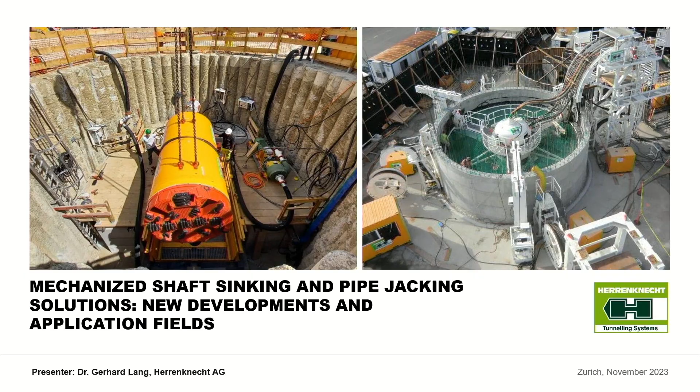For the ones of you who are not familiar with Herrenknecht, we are located in the southwestern part of Germany, the Upper Rhine Valley. It's only a 2-hour drive by car to Schwanau. By the way, in Germany you can drive with a Porsche as fast as you want, not like in Switzerland. So you can break it down to 1.5 hours if you like to, depending on the day.

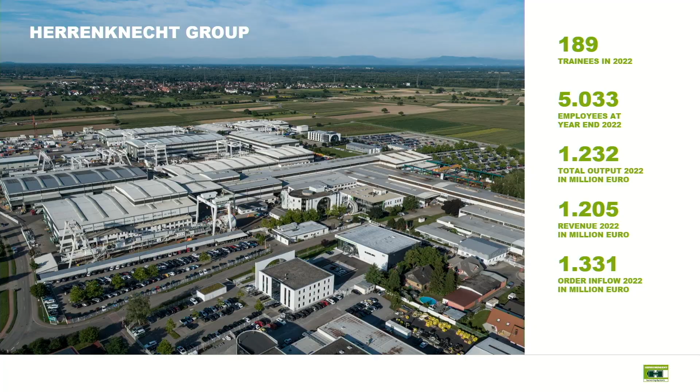Anyway, just joking. We were founded in 1977 by Martin Herrenknecht, who is still running the operation. 45 years later, we have 5,000 people worldwide. We have a turnover of 1.2 billion euro. We have manufacturing facilities in Germany, but also in China, Thailand, and India. At the moment, Asia is very dominant in infrastructure for subway and urban development.

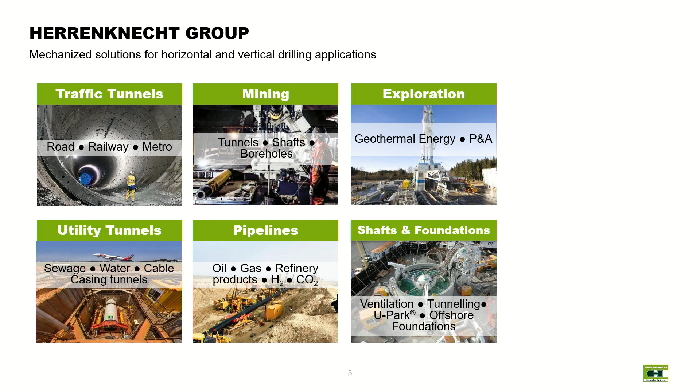We are currently divided into 6 major divisions. Traffic tunneling is the biggest one, of course the bigger the machines, the more turnover is involved. We have a mining division since 2000, exploration, going geothermal—that was our initiator in 2000. Unfortunately we had some failures with Staufen, some cracking, so the geothermal hype at the beginning went steeply down and diminished, but now it's regenerated with our energy crisis. So we need to tap into the soil as a geothermal energy source. We have the equipment and look forward to it, and believe in it.

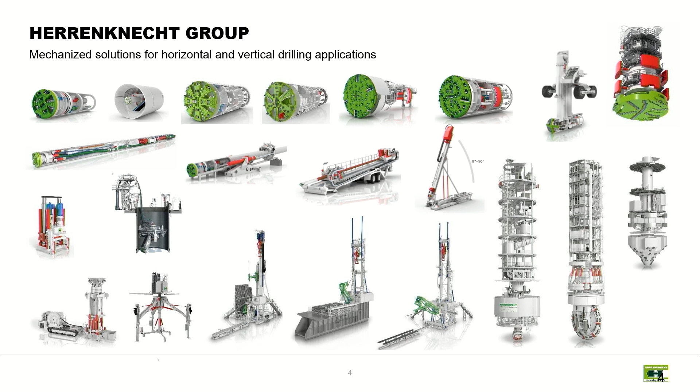That's a viable option. Then we have, on the bottom left side, the utility tunneling—I want to focus today a little bit. We also are in the pipeline business and shaft foundations, which I also have some slides about. That's just a little cross-section. So we are driven by the industry, by owners, engineers, contractors, who are asking for certain types of equipment and technologies to help them do installation in a very environmental and safe manner. And labor is also a big topic at the moment. Automation, digitalization is where we are, robotics—constantly working on it in order to make our technologies smarter, as it's called nowadays.

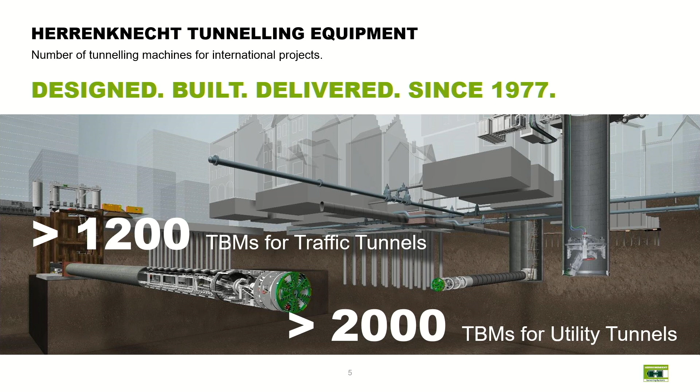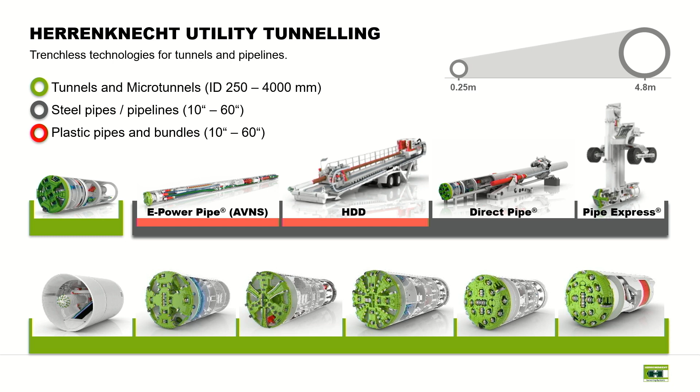As you probably know, Switzerland is a tunneling nation. You are fantastic tunnelers in perfect shape. You have done a world record with the Gotthard Base Tunnel, 57 kilometers, the world's longest railway tunnel. We were lucky enough to supply 4 machines to do the installations. It was really a challenge to go underneath the Gotthard Base Tunnel with 2,000 meters of overburden and really challenging ground conditions.

Let's go back to pipe jacking. I started 25 years ago on the big tunneling side, and the biggest tunnel boring machine at that time was 14.2 meters, for a tunnel in Hamburg. Now we are looking at 17 meter and bigger diameter tunnels. So the trend goes to larger diameters, longer distances, deeper alignments, more curves. So you have so much stuff in the ground, you have to go around, you have to steer around.

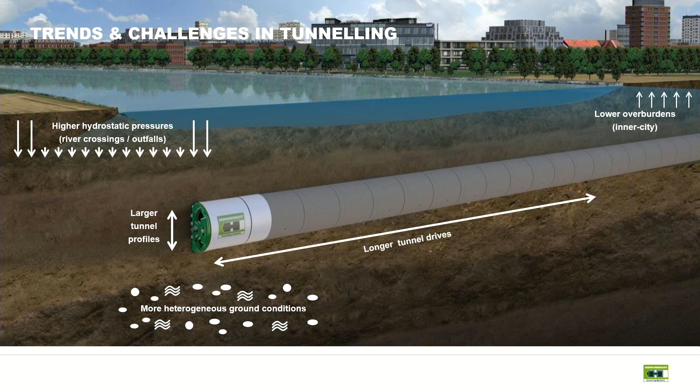But also some shallow applications in an urban environment, because the ground in a downtown area is already so congested with existing structures that it's getting tough to find space for your additional installations. And if you can imagine, as you go longer distances and larger diameters, the type of ground the machine needs to handle is much more complex. If we go deeper, we have hydrostatic water pressure. We heard in the morning about the Lake Mead project, 140 meters below the ground, or we are talking about 400 meters now, or 500 meters, which is 50 bar. Crazy—I don't know, are you scuba diving?

So if you try to go scuba diving, up to 20, 25 meters, it's okay. But below 25, 30 meters, you need a tri-mix. So your health is really at risk, and that's only done by professionals.

And when we talk about 500 meters, I'm not sure. We need robotics, I think it's not human anymore. But it can be done, definitely, don't get me wrong. And that's why we are relying on those projects to push the envelope. This gives us another vision to accomplish in the next whatever years.

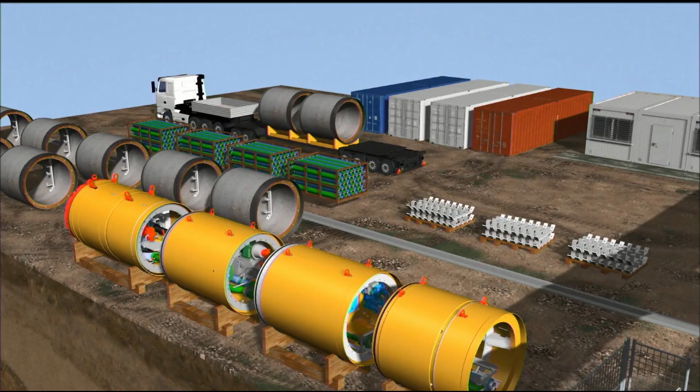So back to pipe jacking. Pipe jacking has been very popular for around 40 years. You have a launch shaft and a reception shaft, beneficial in urban environments, because it's minimum interruption on the surface. You have a jacking frame in the shaft, and you have a thrust block.

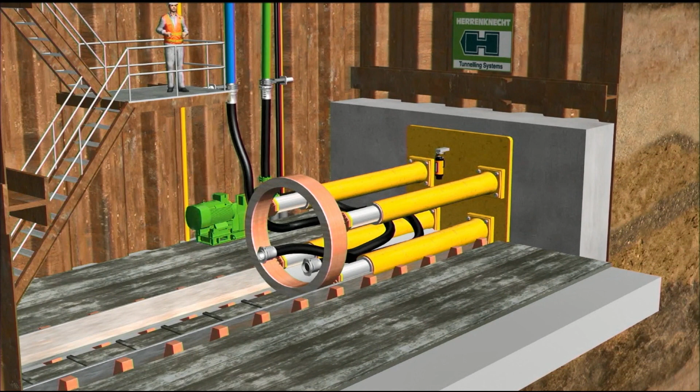The shaft needs to be embedded in the ground so that you don't get deformations. If you have deformations in your shaft, you cannot operate and steer the machine properly because your guidance systems get weird. Once you have installed everything and you launch the machine, you lower it and extend your thrust cylinders. Important also is a seal, everything needs to go through a seal here to avoid flooding the shaft.

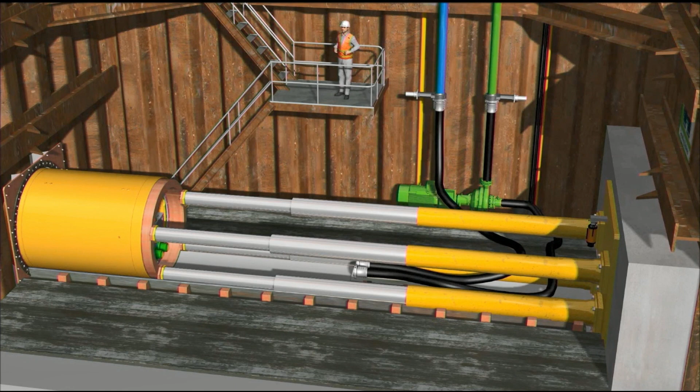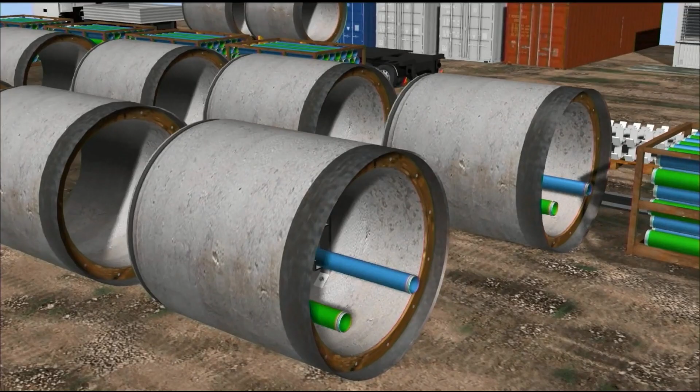This type of machine is a slurry machine, which is the most popular one. You have a feed and discharge line. We are using a bentonite slurry to transport the cuttings, the excavated material, back to the surface. And of course, that's what we all know, yeah?

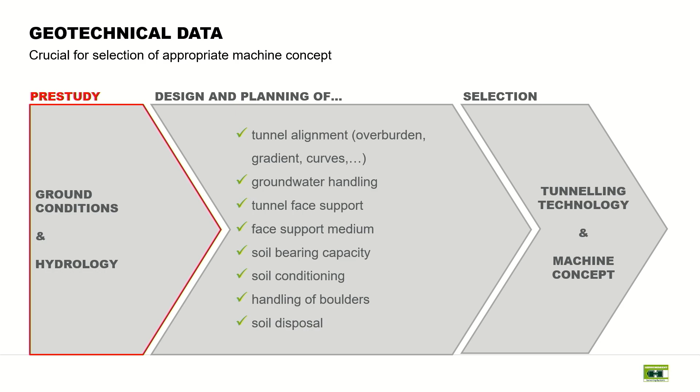We are dealing with the ground. We are dealing with all kinds of mixed ground, hard rock, whatever. Nobody knows, nobody has a crystal ball. We do some investigations, but everything in between is kind of an uncertain area, some kind of speculation. So the ground is the boss for trenchless installations. It decides what type of machine, what type of tools, etc., and that's governing the success and failure of your operation.

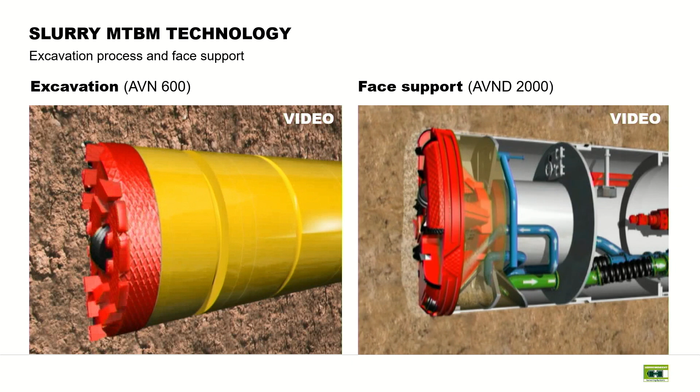In pipe jacking, you have a conical crusher chamber, which acts like a coffee grinder. You're grinding down the material until it's small enough to fit through these openings on the invert. So it's a conical crusher chamber, and all the material goes through here. Whenever it passes, it's caught up by the discharge line.

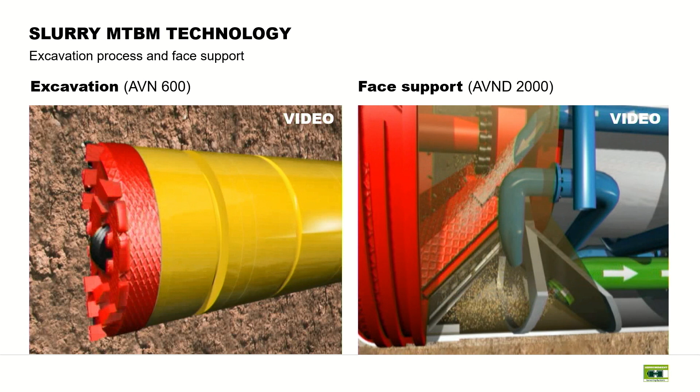The green line, the discharge line, pumps it to the surface. You have a separation plant, shakers on the surface, where you just separate the bentonite slurry from the soil. Then the clean bentonite is recirculated into the excavation chamber. So basically you are pumping slurry in a loop, adding soil in the excavation chamber and removing it on the surface.

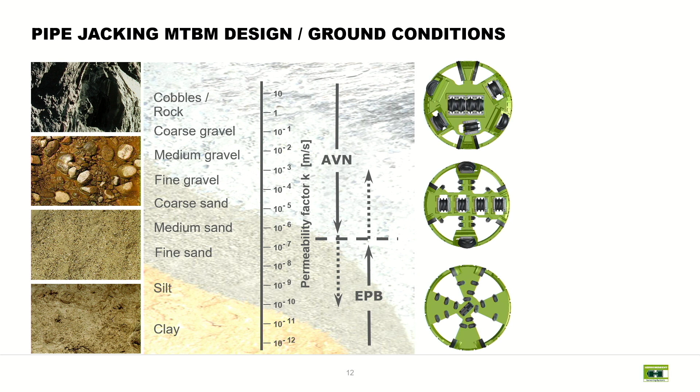You have to have a certain cohesivity in the ground. You need the clays to silts in order to make this technology work. And that's also shown here, the AVN and the AVND. AVND is just an extension where you have another chamber behind the excavation chamber, the working chamber, filled with bentonite and an air bubble, which sensitively controls the tunnel face.

Because mechanized tunneling is all about advancing the machine and installing the liner without disturbing the tunnel face. That's the key. And if you have a slurry type machine, the bentonite slurry stabilizes the tunnel face in a very homogeneous, sensitive way.

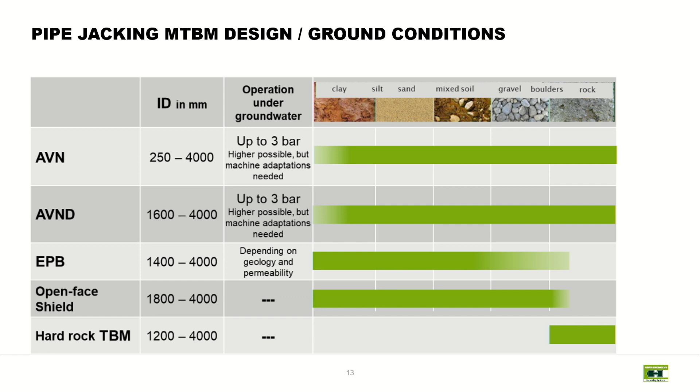The pressure rating is 3 bar. It's very low. That's a standard machine, but the standard application in an urban environment is 30-meter depth. That's typical. On the small diameter side, we can go up to 10 bars. That's a limit at the moment.

As we talk about pipe jacking versus the big tunnels, in the big tunnels you install the liner and advance the machine. Here you have to push the whole pipe string, not just the machine. The whole pipe string needs to move. And that's why I was so excited when I switched from big tunneling to the smaller equipment. First of all, all the equipment needed to operate the machine needs to fit in a much smaller cross-section.

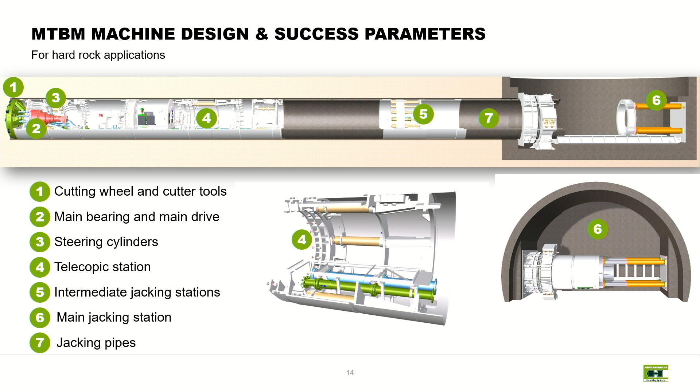And in addition, you have to move the whole pipe string. So the whole pipe string needs to be equipped with tools to make sure you make it from A to B. The longest pipe jacking, the world record in pipe jacking, is 2.5 kilometers. It was the Europipe tunnel back in 1994. Now you will ask yourself, why is this still the world record?

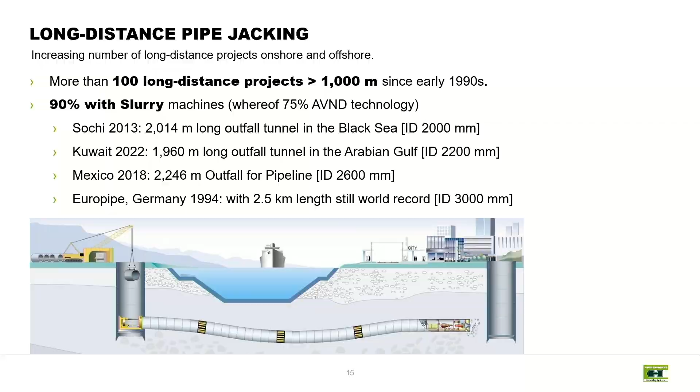We have 2023, and the record is from 1994. It's like a forever distance. But there's a certain distance where pipe jacking is not economical anymore. Since you have to move the whole pipe string for 2.5 kilometers, imagine how much force you have, frictional loads around the pipe. It's smarter, more economical to switch to segment liner operation where you only push the machine, not the whole tunnel and the whole line anymore. Important for pipe jacking, and that's a lifeline, is to lubricate the pipe around.

So the machine is excavating with an overcut, meaning the machine excavates a bigger hole than the pipe is, and this overcut is filled with a bentonite lubricant. Not the bentonite slurry. The bentonite slurry transports the cuttings and stabilizes the tunnel face, but the bentonite lubricant is for lubrication. It's around the pipe and fills this 100%, maybe 110, 120%. The additional 20% is where the bentonite goes into the pores of the surrounding ground and generates a fantastic lubricant. And that way you can go 2.5 kilometers with no interruption, best case.

So bentonite lubrication is very, very important to make sure your frictional loads are minimized and you can make it from A to B, whatever distance you're looking at. And in case you get stuck, you can split and use intermediate jacking stations. That's a ring of hydraulic cylinders sitting between two pipes.

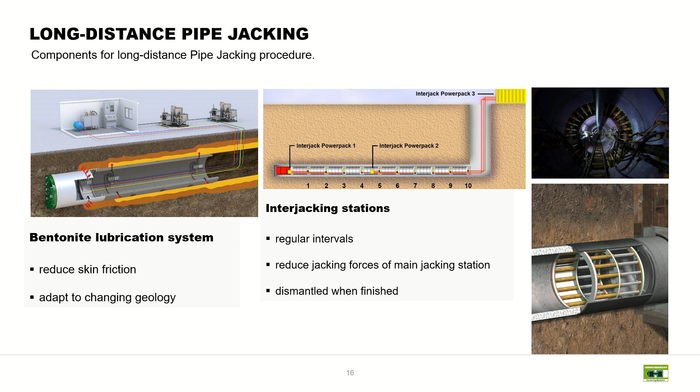And you can activate the cylinders, so you're only pushing the front section and the rear section is not moving. That way you only have to overcome the frictional loads from this intermediate jacking station to the machine. So it's much less friction.

So the IJS is a lifeline for you in case your frictional loads get high because of settlements, or you have a boulder sitting on your pipe, whatever the cause. With the IJSs, you can still make it because you cannot revert the operation. You cannot go backwards. You have to make it to the shaft. Or worst case, you get stuck, and then you have to recover the machine or abandon it.

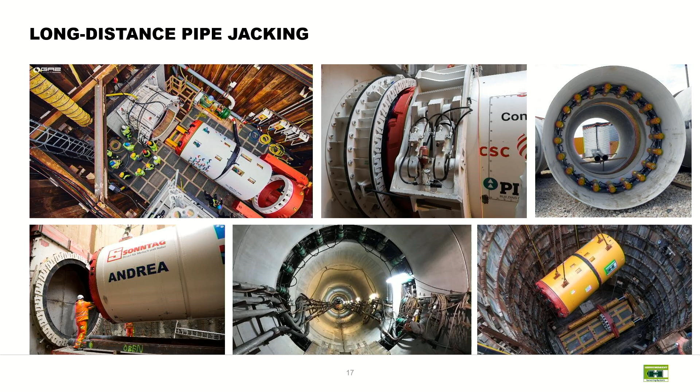All right, that's a couple of slides from a job site. Accessibility to the excavation chamber—the smaller the machine, the more difficult it is to get inside, but it's important because once your tools wear out, especially in long distance tunnels, the tools are exposed to wear. You have to change them, you have to check them. And that's done from behind the cutting wheel.

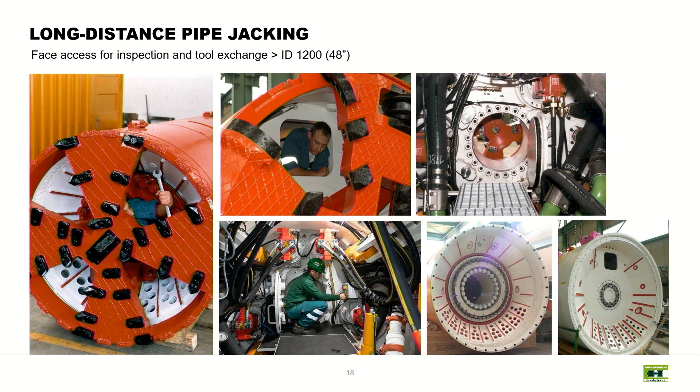So if you're 20 meters down, you're at about 2 bars. Two bars diving, not a problem, we learned. But you have to get under the 2-bar compressed air, and that's why you have an airlock on board. Now this machine has a diameter of 1.6 meters, and that's the minimum diameter where you have an airlock. You sit in the airlock, get under compressed air, open the door, get to the front into the excavation chamber, and change tools.

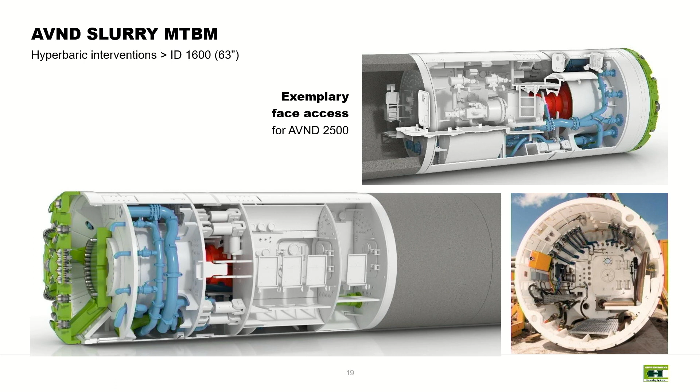Under compressed air conditions, not underwater, under compressed air. So compressed air is basically used to remove the water, to keep the water away from the excavation chamber, together with the bentonite filter cake, which is generated on the tunnel face.

Since we operate under the groundwater level, we can also operate under the lake, under the river, or in the ocean. That's where offshore or sea outfall technologies evolved, maybe 15 or 20 years ago. Basically you launch your machine onshore and drive an outfall tunnel into the ocean for storm sewer or sanitary sewer outfalls, or desalination plants, and then recover the machine.

Once the machine arrives at the predetermined location, you send a diver down, flood the tunnel, separate the machine from the tunnel, lift the machine up to the surface, bring it to the next harbor, recover the machine, and get it ready for the next job.

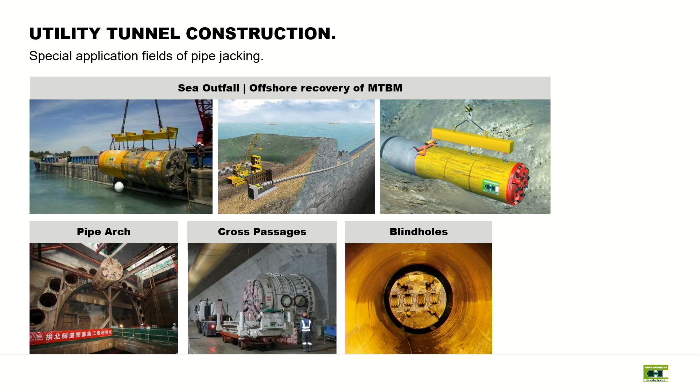More applications are, for instance, pipe arch - if you have multiple installations, you create a pipe arch and then excavate underneath. Cross passages are a big topic with tunnel safety. The same pipe jacking methods and technology are used to create cross passages or emergency exits between tunnels every 200, 250, 300 meters. There are other methods, but this technology can do it very safely too.

Blind hole is also another installation method. This is a project in Mexico, in the Gulf of Mexico. There was an oil pipeline installed there, but the oil needs to be accelerated with booster pumps from time to time. So they have the oil pipeline going onshore to the pump station and then back into the ocean, into the Gulf of Mexico, continuing its journey.

For these connections under the beaches or outfalls, the contractor, together with the engineers and owners, selected the pipe jacking method for a distance of 2.2 kilometers. It's amazing, quite a long distance. But tunneling is all about being prepared for the unexpected - having plan B, plan C, plan D. What happens if we get stuck? 2.2 kilometers is a long distance, a lot can happen.

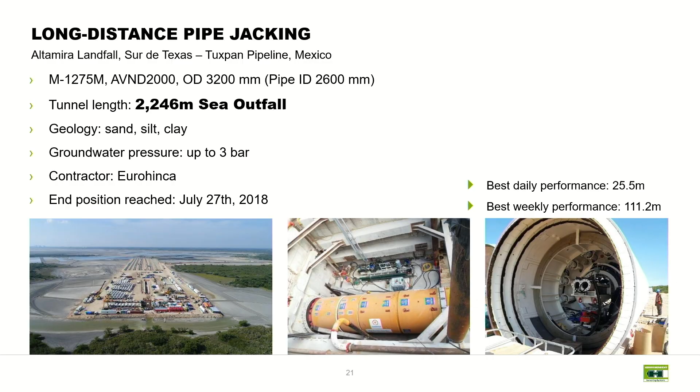There is technology available where you can convert a pipe jacking operation to a segment lining operation, but you have to equip the machine properly. So you have everything on board for a segment lining operation - an erector, a tailskin, gaskets. Once you get stuck, you don't need to abandon the tunnel. You have plan B: convert to segment lining and finish the drive, just in case you need it. In 99% of cases with this kind of push-bore scenario, you don't need it, but for the 1% where you do, everybody's so happy to have it installed beforehand.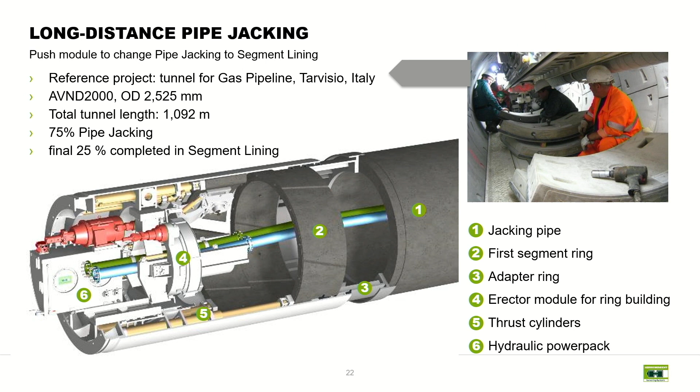But you need to consider the size too. With very small diameter machines, it's tough to operate and install segments. The minimum we have done is 2 meters in diameter to operate and build segments. We always recommend going minimum 2.6, or maybe 3 or 3.6 meters.

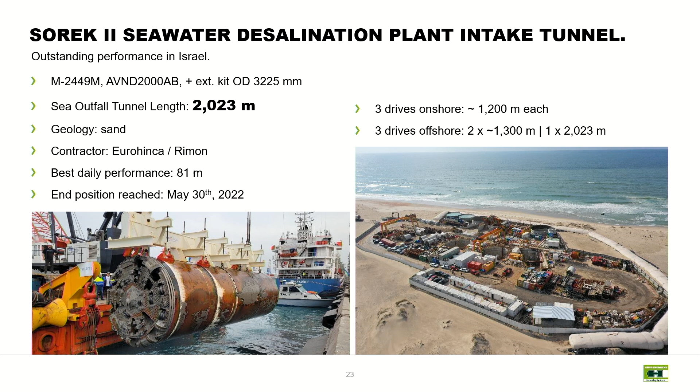This is another installation in Israel for a desalination plant - outfall, recovery, and then bringing back the machine. We are trying constantly to push the limits: distance, diameter, but also curves. How steep can you make your curves, your alignment, your design? That also came down to shorter radii.

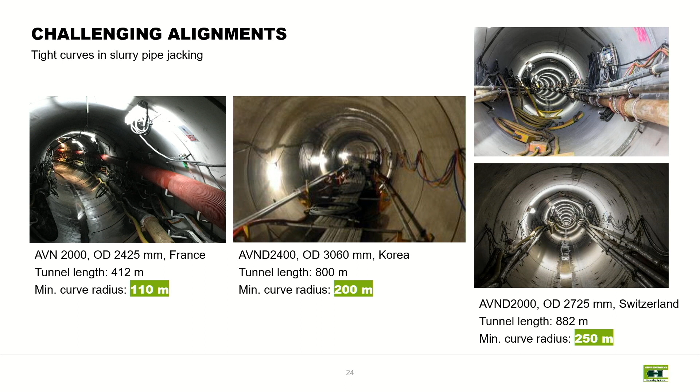The one we're doing is in progress right now for Asia. Asia is kind of crazy - they do 90 degree curves, whatever. Our steepest now, for an Asian project, is a 60 meter radius, which is really a big stretch at the moment.

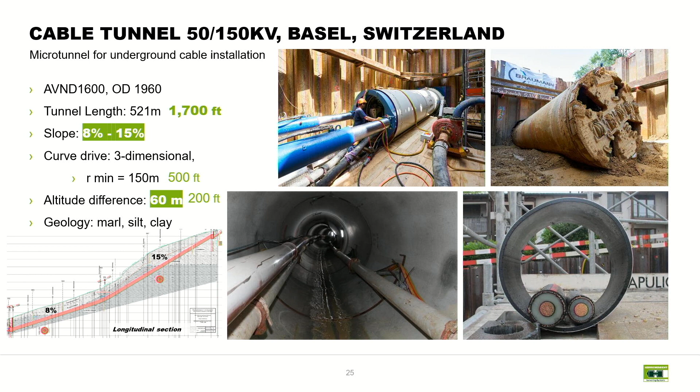Some installation in Switzerland - of course you have the big mountains there. Elevation difference is something you most likely have if you're microtunneling from A to B. Here in Basel, for the installation of a cable tunnel, with 60 meters elevation difference, this goes to 8 to 15% inclination. Just for these power cables, which are much smaller than the pipe installed, it's required to overcome the geology. So again, the geology is the boss - it determines everything, even the size of the machine. Just to install a power cable, you have to install a much bigger diameter pipe.

Anyway, next is direct pipe, E-power pipe. It's like microtunneling, just from surface to surface. You don't need a shaft - you have a steel pipe and a pipe thruster clamping the steel pipe, then push forward, push backward. Push forward, the machine is advancing. Push backward - why would you want to push backward?

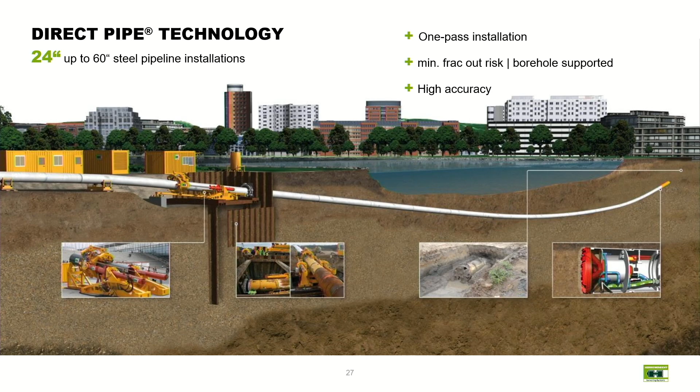So if you have obstruction, if your geology is not what it's supposed to be, if you have trouble with the machine, if you have no tool capacity anymore - that's why I like this technology very much. It's because it's surface to surface, it's much cheaper than a shaft operation, and you can go backwards.

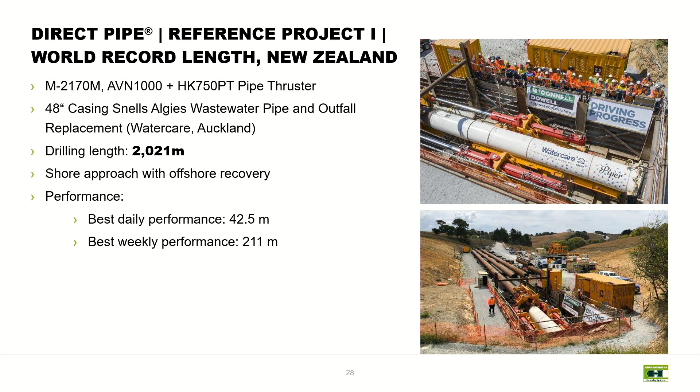So it's like in your car, you have a rear gear. As you are pulling back the machine, you inject bentonite into your borehole, and that way stabilize the borehole until you reinsert your machine and finish the drive. Standard pipe jacking has no backward going. And the limits again, we are talking about 48 inches, about 1200 millimeters, 2 kilometers - fantastic.

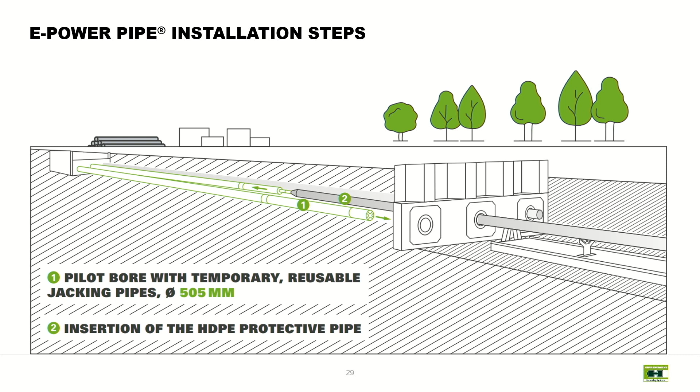Okay, let me skip E-power pipe because I think I'm running out of time here. It's just for shallow installation, we call it E-power pipe, a very small diameter, 500. For power cable installation, we have the wind farms in the North Sea, we have the industry in the south, so we have to install thousands of kilometers of cables throughout Germany to bring the power where it's needed. And that's where the E-power pipe technology is very, very popular.

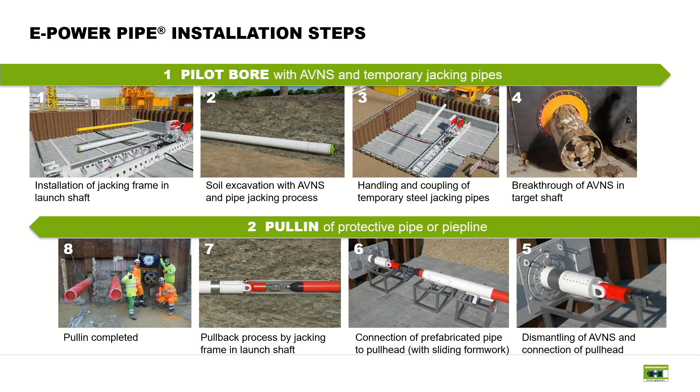Instead of a telescopic jacking frame, you have a rack and pinion system where you recover the pipes. You use special pipes for the installation. Once the machine is on the exit side and dismantles, then you connect your HDPE pipe, which is a casing pipe for the power cable. Then you retract the pipe together with the HDPE pipe and install the conduit pipe for the power cable.

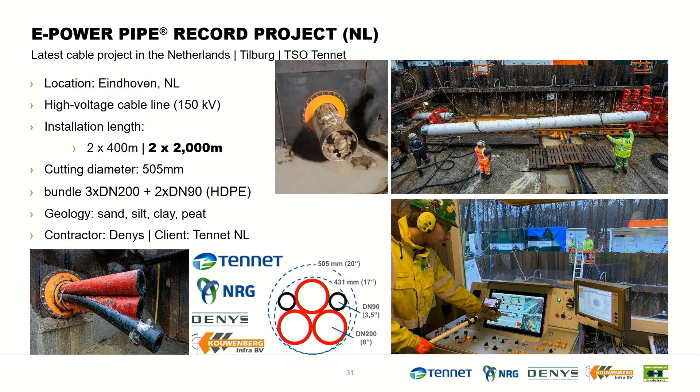And again, 2 kilometers, 500 millimeters - it's fantastic, but it only works in sandy soil conditions, like here in the Netherlands. So it doesn't work in any other more difficult soils.

Then the last topic is vertical shaft sinking machine. It's very economic, of course it's economical, but the reason why it became so popular - we started in 2004 with the first installations and steps in Jeddah and Kuwait and Russia, whatever. Now it's really taking off because it's beneficial in an urban environment.

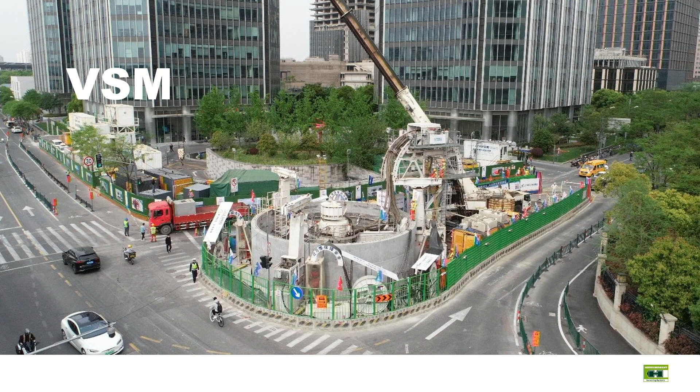Guess why? We are all geotechnicians or whatever - with this installation method, you don't need to lower the groundwater. If you have an installation that lowers the groundwater, what's happening with your surrounding buildings? They get some settlements, right? Unless you have a proper foundation or it's founded on rock or whatever. But whenever you remove the water, you get some settlements, and that jeopardizes not just the buildings, foundations, whatever.

So in an urban environment, a vertical shaft sinking machine means zero groundwater lowering, because the machine operates under the water level. So you're installing the machine - it's basically a pile excavation, just upside down. This kind of technology can be used horizontally, but here it's used for shaft installation. You're pumping water here, you don't need bentonite slurry, you don't have a tunnel face to stabilize, so it's just the water, the groundwater.

You excavate, and then you pump the material to the separation plant up there, and then the clean water goes back into the shaft. So there's no imbalance, no interaction with the water level, not too much. And the shaft is held in place by strand jacks, the weight of the shaft - here, strand jack 1, 2, 3. The whole shaft together with the machine is held in place until you are finished.

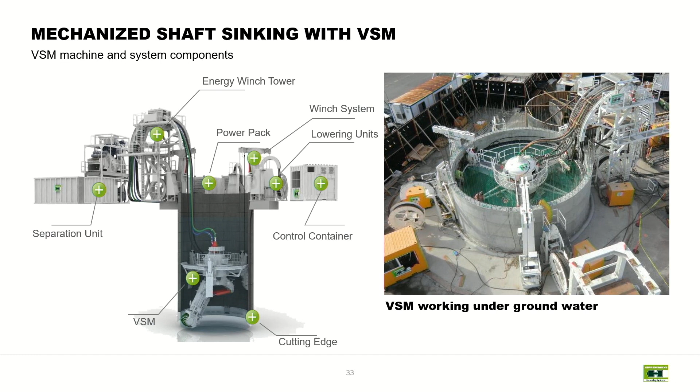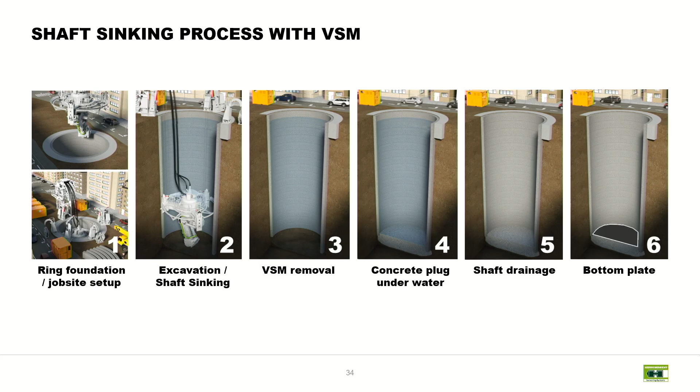So once your shaft is installed at a certain depth, then you install the reinforcement, you pour a tremie block, concrete, and another concrete layer, whatever, until it's stable enough, and then in the last stage you remove the water. So your interaction with the surrounding ground is minimized, so there's no risk or little risk of settlements around.

Different types of diameters, shaft diameters for different applications require different size machines. So the VSM 9000 is for a 9-meter shaft, 12-meter, 15-meter, 18-meter shafts. We're also talking about twin arms on the bigger ones for 23, 25, wherever the development goes. It's constantly, every year, pushing the limits, getting bigger and longer and larger.

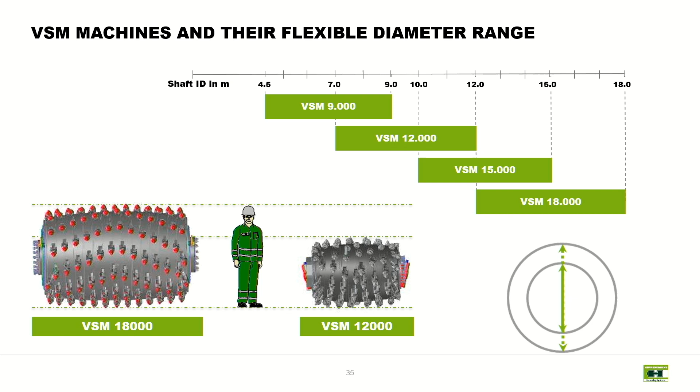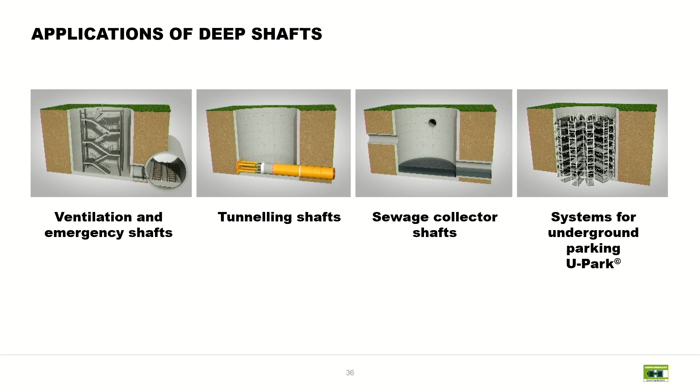Applications include ventilation shafts for existing tunnels, launch and reception shafts for new tunnels, and the most exciting one at the moment is underground car parking systems. How tough it is to get a proper parking spot in an urban environment. How much do you have to pay for it? How much is real estate cost in an urban environment? And why don't we put all the cars under the buildings, making them part of their structure?

Well, the limitation at the moment is 10 bar, which is about 100 meter shaft depth, and of course the geology - depending on the tools, we have some limitations.

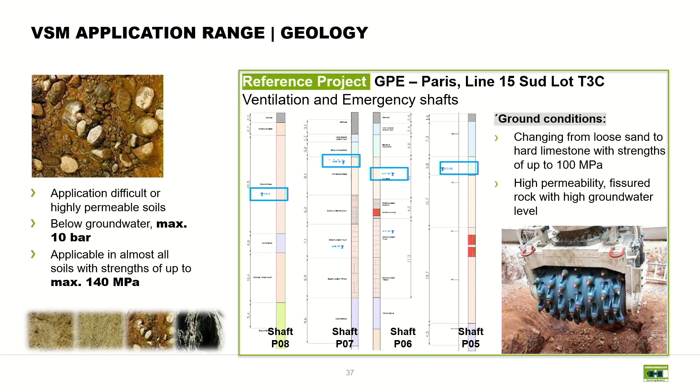Every technology has it. We are at about 140 MPa.

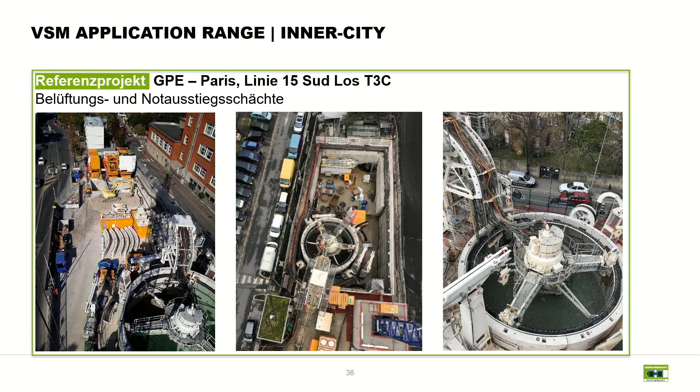One big project last year, or the previous years, was the Grand Paris project in Paris. See how small the footprint is, where you can install the shaft in a really tight spot with minimum noise, minimum dust, and whatever, and save minimum risk of settlements. So 45 meters or 35 times 18 meters, that's enough where you can install.

Look at this in Spain, that was one of the first projects. The distance between the houses was 12 meters, and it was a ventilation shaft for a subway underneath.

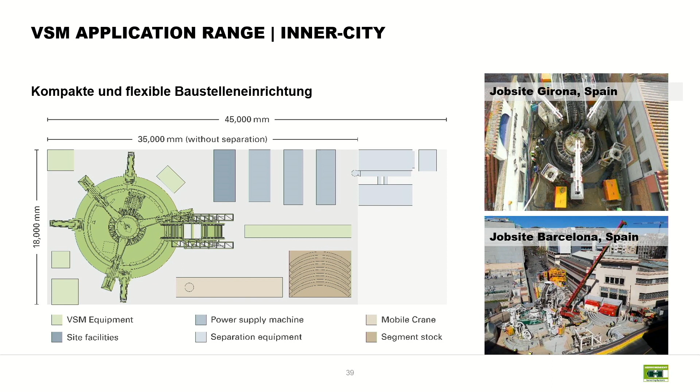I already indicated underground car parking, different size. The bigger the diameter, the more cars we can create space for in this underground car parking system. Basically, you put it in a garage, go shopping, come back, your car stands there and comes out of a system and recognizes where you are.

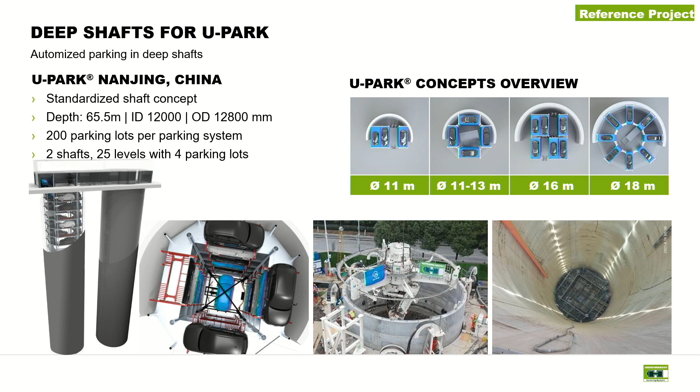It's the first installation in China. In China, there are many more of these projects being planned as part of the infrastructure projects. All right, that's it.